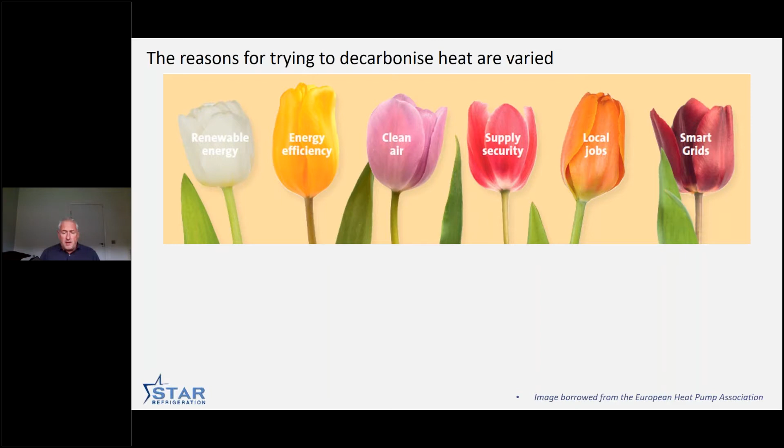It's really about interfacing the demand side of electricity consumption with the generating capacity. We've gone in the UK, I think somebody once said, from 60 power stations to 60,000 power stations that are much more variable. Heat pumps have a huge opportunity to help balance that by being ultra flexible and being able to switch off at very short notice, or modulate the capacity and use thermal storage. And we'll hear some great stuff about thermal storage later on as well.

So why is heat really the key thing? It's a huge part of our carbon emissions. If climate change is mainly about carbon dioxide, it's mainly about burning fossil fuels, and burning fossil fuels is mainly about heating stuff, certainly in a Scottish or UK context. So we're aiming at the big chunk of the challenge, and that's really the important bit. This isn't just a niche little afterthought. It's a huge bit, and the progress has been poor. It's really not achieved very much.

The numbers that get put up round about low carbon heat probably are mainly biomass, which had a tremendous trend for a period, and it's maybe not quite gone forward the way people hoped. Perhaps air quality concerns crept in, and that undermined things. Perhaps it was supply chain challenges, but it's really drifted off the agenda, and very seldom do I hear people talking about it so much. That's not to say it's not got a place, but it's really gone off the radar a little bit.

So the other reason that there's a big challenge with heat pumps is we're using heat in lots of different places, lots of spaces, at least 6 different bits going around the wheel, from the classic tenement in Glasgow to the city centre of Glasgow and the high density commercial areas, to new parts that are being built around the city, whether it's next to the science centre or further downstream. New build housing estates, still plenty of houses being built, and they all need to do clean heat. And then, of course, fixing all the old houses, the existing building stock.

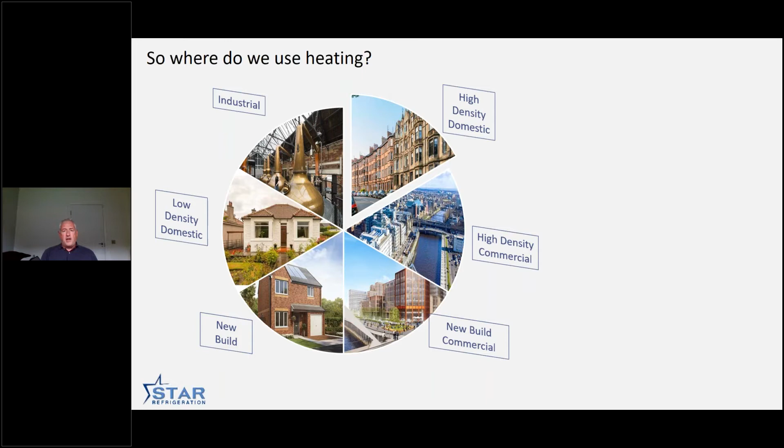So very, very different. And at the 11 o'clock position, industrial heat sources, a colossal amount of fossil fuels burned as part of industrial processes, whether it's brewing or distilling or food manufacture. Huge demand for that, and it all needs to decarbonize, and in many places it can do with heat pumps. So we're seeing it across all different sectors, and we're now beginning to see 100 plus, 160 degree heat pumps being talked about, and there's been some really good pilot projects done. So lots more to come on that in the coming years. So that's part of the reason it's very challenging.

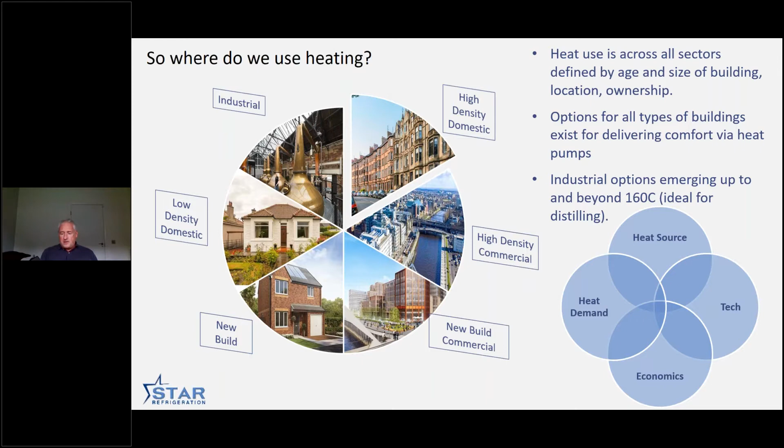Whenever there's conversations about heat pumps, people invariably start getting mixed up between the different bits, and they're all relevant, but they've all got a separate place. So when I think about heat pumps, I'm not thinking about the actual kit. I'm thinking about the business proposition. And for me, any heat pump needs to have a heat source. You need to have the right technology in place. You need, of course, to have a good understanding of what the heat demand is, and that has to stack up in an economic sense. I don't think we're going to get terribly far if we're suggesting that heat pumps are deployed, but they'll be 3 times the cost of burning gas. That's going to be a tough gig.

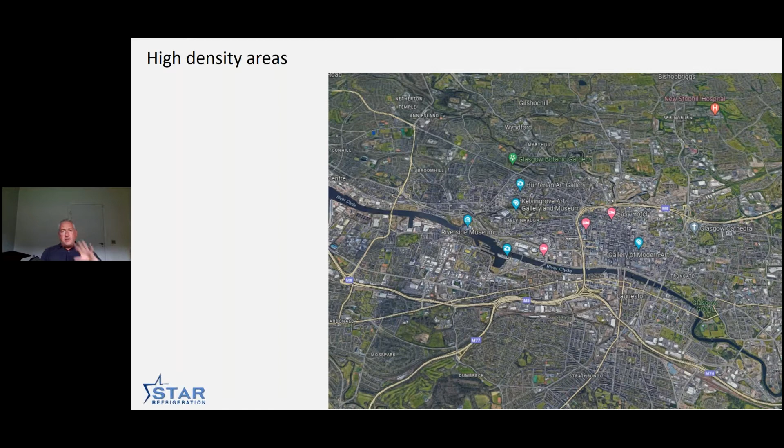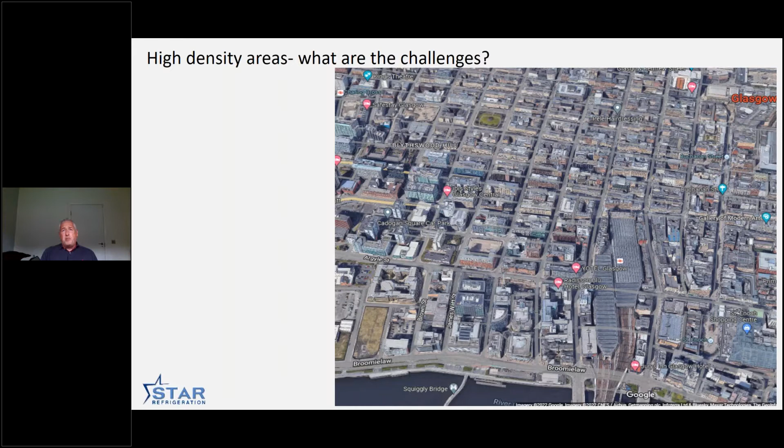So very specifically, this part of the presentation today is about high density areas of Glasgow. So slightly zoomed out, that area there that you can see. If we look at it a little bit closer, it's about the big buildings, probably over 5 or 6 stories. There's some much larger ones being built in the city centre, and for obvious reasons, it's a little bit difficult to put individual heat pumps into every single one of these buildings, for various reasons, including the sheer amount of heat demand that's required. We're not going to go around Glasgow and do external wall insulation of all these old historic buildings. Limited free space round about for any external works, whether it's in the ground or in the buildings themselves.

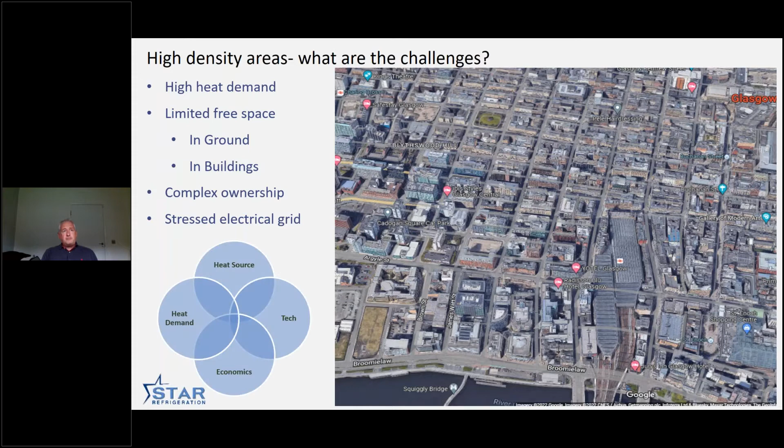Complex ownership structures, where you might have a building and there's a difference between the ownership and tenancy. And then, of course, the electrical grid. Most of the heat pumps that are being deployed are using electricity, and you've got to get the electricity to the heat pumps. And the closer you are to the building, the more stressed the grid tends to be. So perhaps centralizing the heat pumps is a way of doing that for these particular areas. So again, thinking about what the picture looks like in terms of those 4 parts of the Venn diagram.

So what have we done? Well, this is a quick flyby. Video speaks louder than words. Pictures have kind of stepped in in between. But this is Queen's Quay looking east up the river, the Clyde estuary. On the left is the energy centre, the college in the background, and the swimming pool behind that.

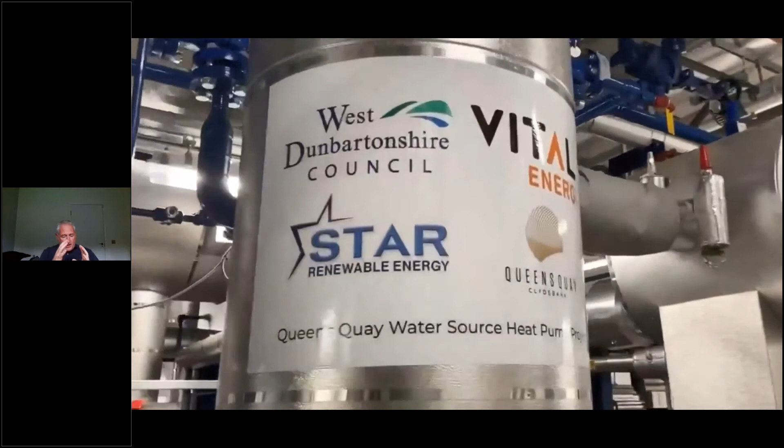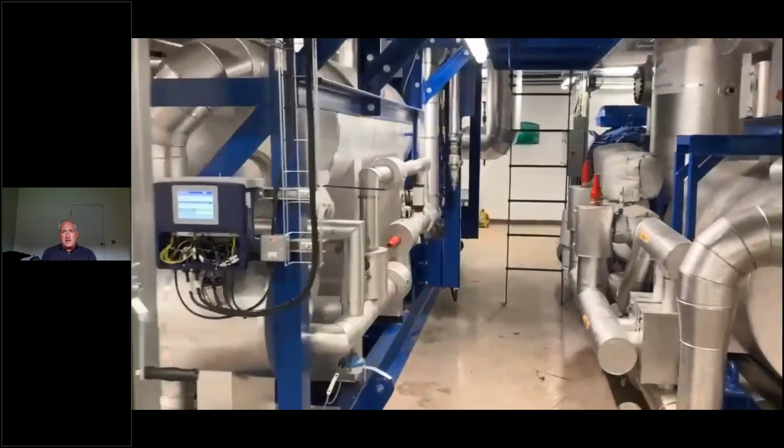And inside, really what I've tried to convey is this is a big chunky heat pump. This isn't something that sits perhaps in my garage through there. There's a Kensa heat pump, or anything outside the house as an air source heat pump. This is chunky kit for chunky jobs, and that's what was designed and manufactured in our factory in Glasgow, and deployed in Clydebank, and subsequently also in Bristol city centre.

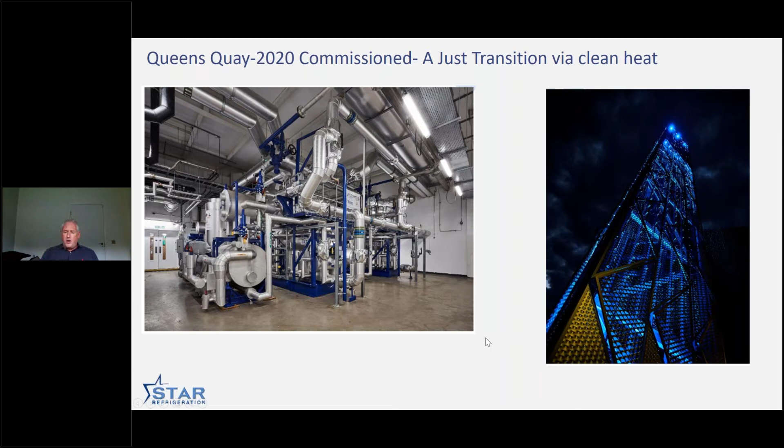And we've done overseas projects from Norway to Switzerland and Belgium and France. So plenty of activity over the piece, but always there's this little thing going on about how do you make this happen as a business model. So great project down there on the right hand side. You can see the thermal store, which is giving us a little bit of ability to move around when we're buying electricity, and that's going to be a significant part of the future.

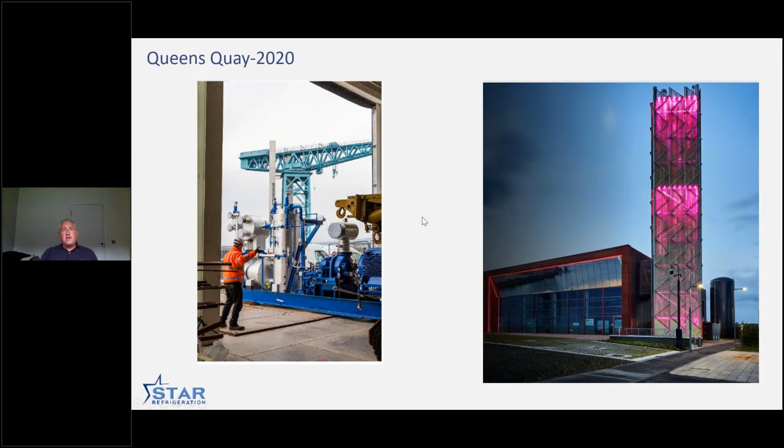But it's a great building, and it's part of the community down there. They've really done well to make it stand out. And again, you can see it's chunky kit that's being deployed in these big capacities. And what's it serving? Well, this is the Wheatley Group's new social housing block, and ultimately, I think there'll be 40 different buildings all served from these 2 heat pumps. Everything from the town hall to the sports centre, the Jubilee Hospital is on the plans as well. And it's really just about bringing pipes in the ground to these buildings and connecting them up and bringing that heat demand back to the central location and really sweating the asset as much as possible.

So to the second bit, moving from is this possible? Yes, it's possible, but what has to happen for it to be repeated? The project at Queen's Quay has some very peculiar circumstances around it. The renewable heat incentive existed in the UK's policy map at the time, and that basically paid twice the cost of burning gas at about 2.5 pence not to burn gas. So big subsidies over 20 years to do this. And then there were added subsidies in Scotland.

It was through the low carbon infrastructure transition programme, and down south the Heat Networks Innovation Programme is supporting local authorities typically to deploy heat networks, hopefully with low carbon heat sources, and a prime example of that is district heating. But these are not the long-term aspirations. So what do you need to repeat Queen's Quay in different bits? Well, the first bit is you need to have a heat offtake surety, and this basically means you need to be certain you're going to sell heat from the district heating.

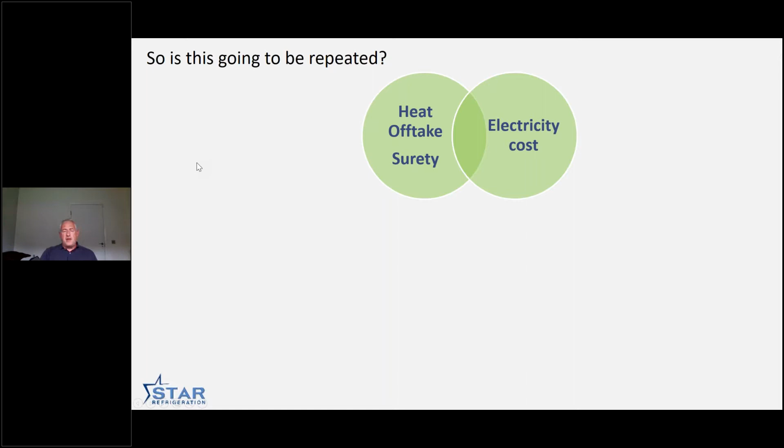So I'm going to give it a yes for the first bit and a maybe for the second bit, because there are quite well travelled plans already. You know, put aside everything you see in the news about politics and what's going on, the civil servants work away in the background trying to bring new policies along, both in Scotland and the rest of the UK. There's work being done on zoning, which basically is saying all the cities have to decide which bits of the city suit district heating and which bits don't, and think about how best to make that happen. So yes for the first bit and maybe for the second bit.

The piece of work that's underway is under the banner of REMA, and that's the Review of Electricity Market Arrangements, and that's basically looking at the way that we charge for electricity. We need to move forwards from ending up with too much electricity in one part of the country and not enough in the other, and a common price across the piece that stops suppliers offering preferential rates to help people use electricity at a better time.

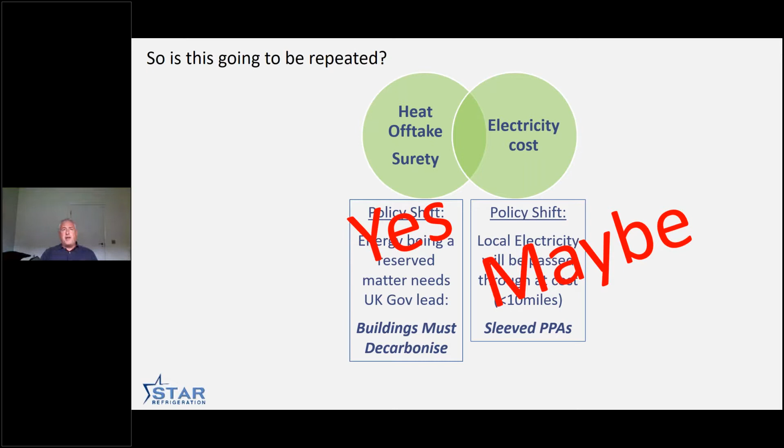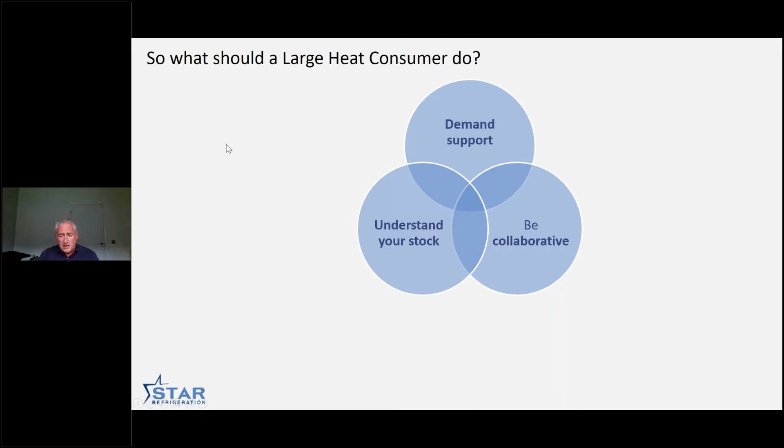So what should large consumers do? You know, if it was a university, for example, or a housing association, really it's about demanding support from the local authority. Don't try and solve the problems yourself. Be collaborative and understand your building stock. You need to know how much heat you're using and at what temperature the water is being used, and think about what's possibly going to happen. So speak to the local authority and say, look, we'd be really up for district heating if this came to our corner of the world.

And understand your building stock, you know, how much heat is needed is a key number, and how to do that. And think about the neighbours. Think, you know, all the buildings round about you, wherever your building might be, have got the same challenge. So don't try and do it by yourselves. Be collaborative, get speaking to the neighbours, and try and work out how that could go.

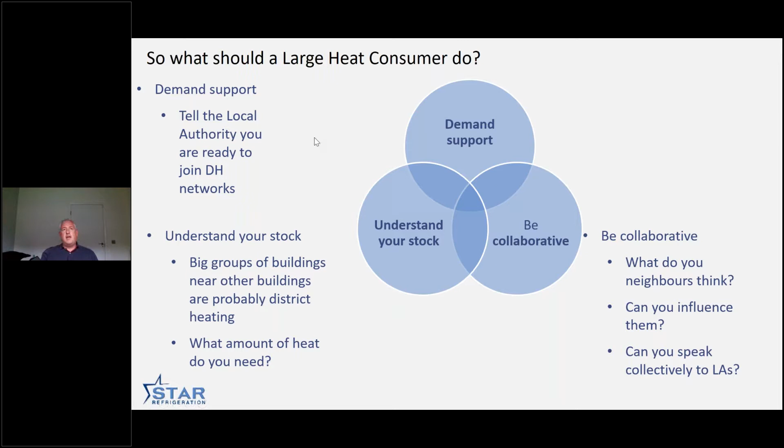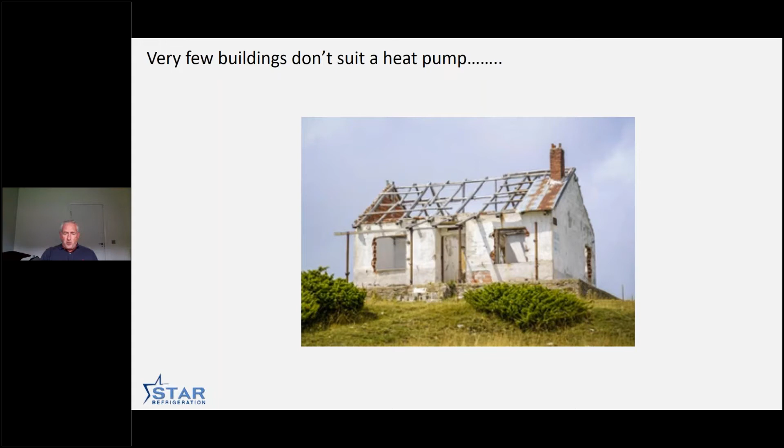Slightly flippant graphic from me, because I keep hearing that some buildings aren't suited for heat pumps, and I eventually found a picture of one on the internet that I don't think is really suited to a heat pump. But apart from that, whether it's small heat pumps or large heat pumps, any building in the UK could be heated with a heat pump, whether it's an individual heat pump just for that building, or a couple of heat pumps as a cluster, or part of a wider citywide district network. It's possible that all the buildings could be heated with that.

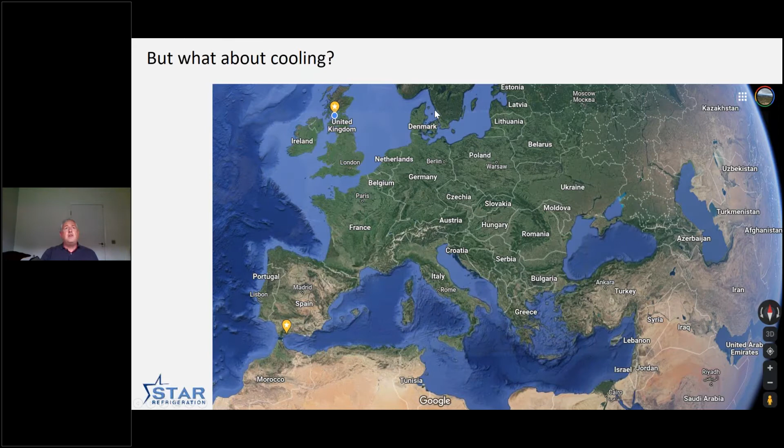Now, the next question that comes up with heat pumps in the last couple of years is, what about cooling? And really, it depends where you are. So where do you live? What sort of building vintage have you got? Does the building actually need air conditioning? Does it not need air conditioning? And some would argue that we might see these coupled together, where there's shared ambient networks where heat is being moved around from building to building.

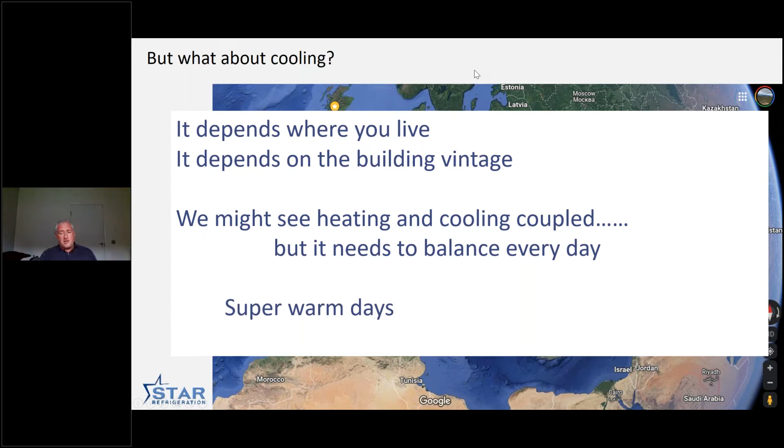A slight caution from a UK context is it needs to balance every day, so that the amount of heat going into the network has to equal the amount being taken out, and that has to happen on super warm days where it's cooling only and not much heat demand, but also has to happen on super cold days.

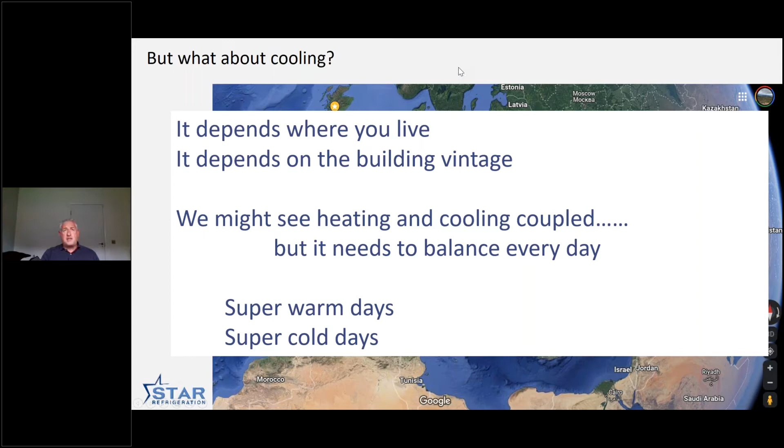So we've got to make sure our networks are designed for this, and maybe cut through some of the excitement around what seems like a good idea. But let's get into it in more detail.

It's less though than the amount of heat that's available from the river that runs through, and in fact the tidal reach of the river is way up in the sort of Gorbals area of Glasgow. So actually it's the tide flushing in and out twice a day that's bringing that ambient heat that can be harvested with the heat pump. So we've got enough capacity in the river.

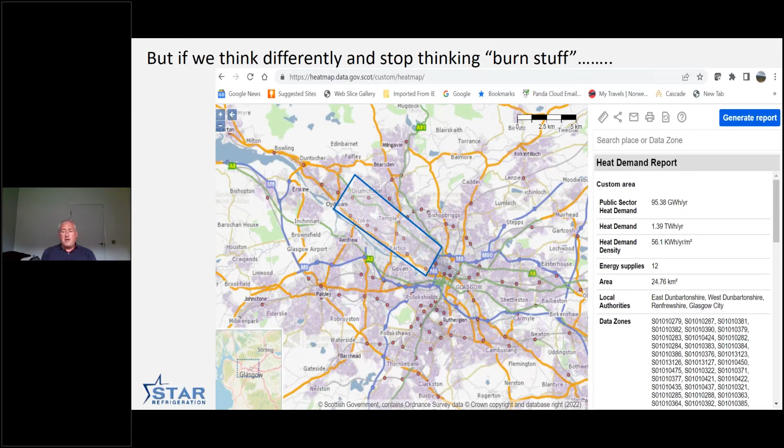We're building more and more wind turbines, and it tends to be windy when it tends to be chilly. And obviously there's some gaps that have to be accounted for. But broadly speaking, when there's a heat demand, there's an opportunity to generate electricity and then to harvest that. So if we get the electricity networks correct, get the pricing correct, and then of course start this colossal building program of district heating through the cities and connecting these buildings up, joining the dots, it should be possible.

So what about the Middle East? I touched on that, and this was a piece of work we did quite a long time ago that hasn't come to pass, but just to give a concept of thinking differently, if we start thinking about energy as a commodity rather than this sort of burn gas to heat stuff up. We were asked by some consultants to look at a city in the Middle East, and they wanted cooling, quite understandably so. But they also were wanting fresh drinking water.

You could deploy the sort of heat pumps that we've done in Clydebank, where the cooling part was used for cooling the city, but the hot part was used to desalinate seawater, and just totally turn the whole equation on its head. So the point is, if we start thinking about what the challenge is a little bit differently and not base it just in fossil fuel, we might see a completely different outcome from what we've been doing before.

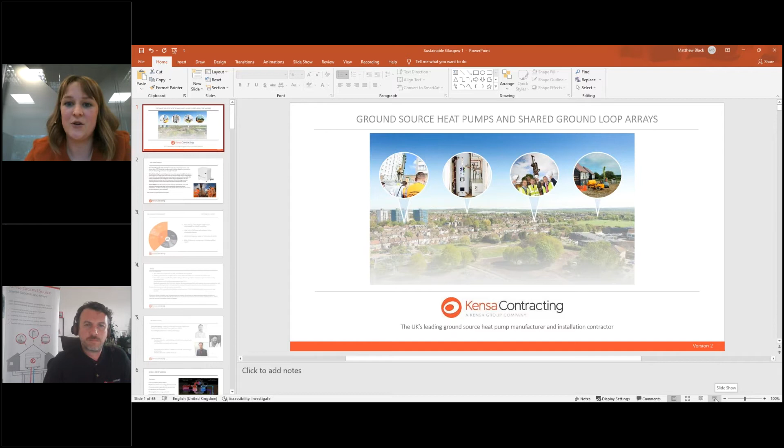who deliver ground source heating systems to domestic and non-domestic buildings, offering long-term sustainable solutions to the climate emergency and fuel poverty by providing low-cost, low-carbon warmth to Scotland's communities. So over to you, Matthew. I'm really excited to hear about your flagship project.

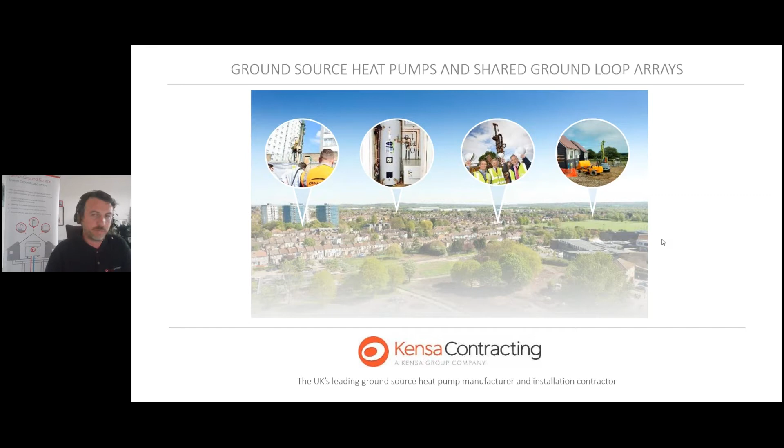Thanks very much indeed, Emma. Hope you can all see me and see the slides in front of you. What I'm going to do is just take people through a bit of an introduction into who Kensa are, and ground source heat pumps and some of the projects that we're installing in Scotland.

So just as an introduction to let you know who Kensa are, the Kensa group is made up of 3 companies. Firstly, we are a dedicated manufacturer of ground source heat pumps. We have a factory just outside Truro in Cornwall. That factory and our head office is on top of an abandoned, flooded tin mine, and we actually have pipe in that flooded tin mine, and we're using that heat to heat our factories and head office there.

So in that factory, we make about 20 to 30 Kensa heat pumps a day, and we supply them throughout the whole of the UK, and then provide other products and technical support to those contractors. Kensa Contracting has been around about 10 years, and that started to really facilitate the wider rollout of ground source heat pumps, initially through social housing, but increasingly through volume builds, new build housing, and through retrofit programs, some of them tackling fuel poverty and some of them more carbon emission focused.

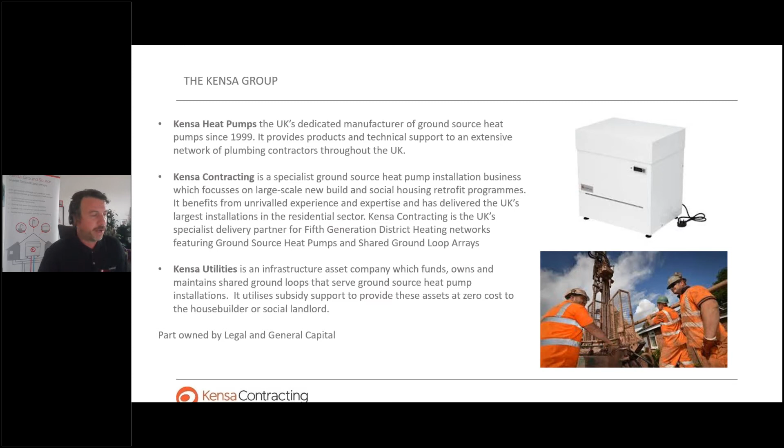And then the third company that we have is Kensa Utilities. That's set up as an infrastructure asset company to basically finance boreholes and ground array and the infrastructure. Like any infrastructure, such as broadband or water, ground source requires a bit more investment. So Kensa Utilities is set up to provide funding and financing for that infrastructure, and the group as a whole is part owned by Legal and General Capital.

So historically, there's not been too many ground source heat pumps installed in Scotland. It works so we have pipe work in the ground. Normally that is a vertical borehole, and through that pipe work we're circulating water and antifreeze, and the temperature coming from that ground typically is about 10 degrees. And the beauty of that is no matter what the time of year and what the air temperature outside is, we'll always be providing that heat pump with about 10 degrees.

And that's important because the efficiency and therefore the grid requirements, the demand on the grid infrastructure, how much it costs people to run their heat pumps, and the carbon dioxide emitted from the system is dependent on the incoming temperature and the outgoing temperature. So we can provide 10 degrees all year round regardless of what the air temperature is outside.

And importantly, typically about 2/3 of the energy for heating and hot water comes from the ground, and 1/3 comes from our wonderful Scottish renewable electricity, and that's just used to run a compressor and to run the heat pumps. 2/3 of the energy is effectively free from the ground, and 1/3 coming from electricity.

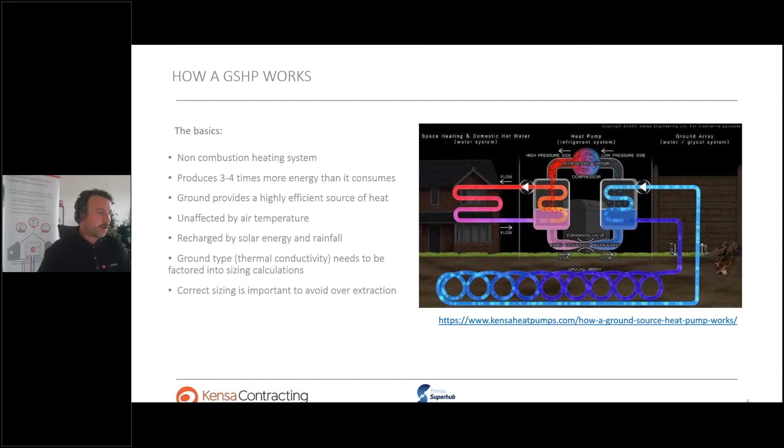So why ground source? It's unaffected by air temperature and air humidity. These heat pumps normally sit inside a building or inside somebody's home. Another white box that's pretty much a replacement for a gas boiler. Instead of being connected to the gas pipe, it's connected to a borehole array. So just a different set of pipes and a different white box.

So we can also provide cooling. So as well as taking a large volume of heat from the ground and compressing that and providing that for heating and hot water, we can also take heat from a home and put that back in the ground. So we can also provide cooling as well.

We can also use other waste heat applications. So we might be able to use open loop, so from some water source, an underground aquifer. We have a large project that uses an underground aquifer, but we can also use waste heat from industry. We can also use water source, so we can either float pipe, closed loop pipe, in a large water source, or we can extract that water and use that to heat buildings.

So the heat pumps sit inside. They last about 20 to 25 years because they're not open to the elements. And once we drill a borehole, it's there for around about 100 years or more. So it's more of a longer term strategy, a more sustainable legacy project, not something that you would be thinking about having to replace in the short term.

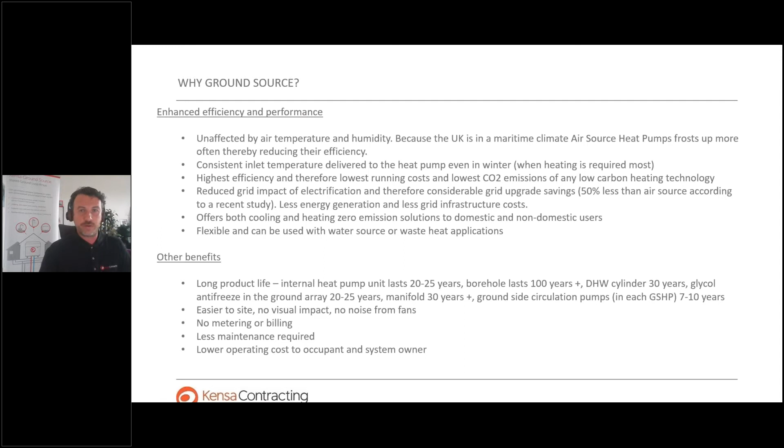There's no fans like air source, and from a heat networks point of view, if this is part of a heat network, it's normally connected to the electricity supply that's coming into the building. So you pay for what you use through your electricity bill, and there's no need for metering and billing.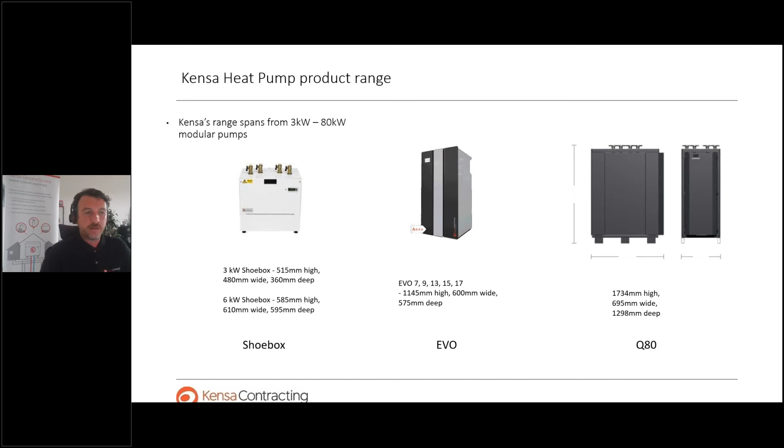And then we have the Evo, which is for slightly bigger properties, and then we have our Q80, which you can bank together for more commercial projects. So sometimes we'll also be providing heat to things like leisure centres, public buildings, hotels, and so on. And that's where we might have a few larger heat pumps banked together to serve those projects.

So normally when we're talking ground source, 90% of our projects are closed loop boreholes. And that basically means that we dig a hole, and then we have a drill which drills a hole vertically down. The hole is about 6 inches across, but is up to 250 meters deep. And once that is drilled, we insert pipework into there. We grout the hole back up, and then we fill the pipework with water and glycol.

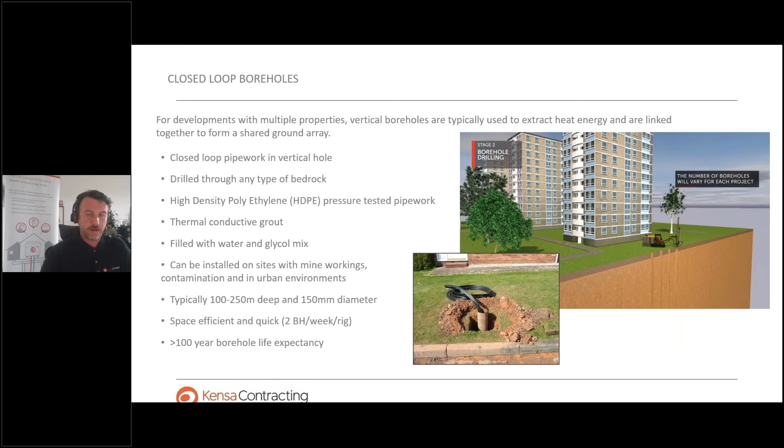And we install those into many different sites. So sometimes we'll go to a site and it might be contaminated, or it might have mine workings in it. We also drill in the public highway, we drill in car parks, anywhere essentially you can drill a borehole. And we do this in urban environments as well. So it's fairly quick and fairly space efficient, and once it's installed, that borehole will be there for a very long time.

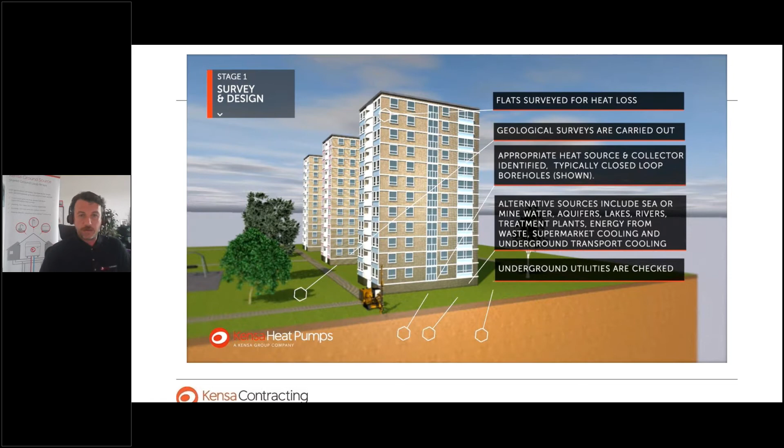So I'm just going to run you through a very quick animation. So we do quite a lot of tower block projects and retrofit projects. So this just shows you the installation process for a tower block. So we'll survey the property in terms of its heating and hot water requirements, and we'll look at the local geology. And we'll check underground services that may be there, and then we will come with the drill rig and drill holes in the ground.

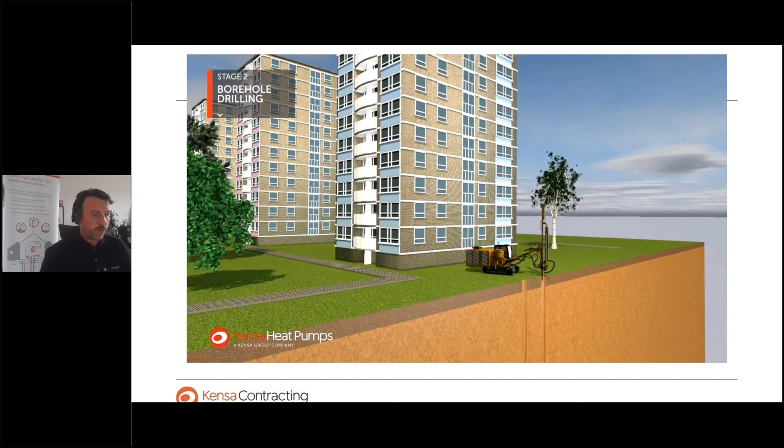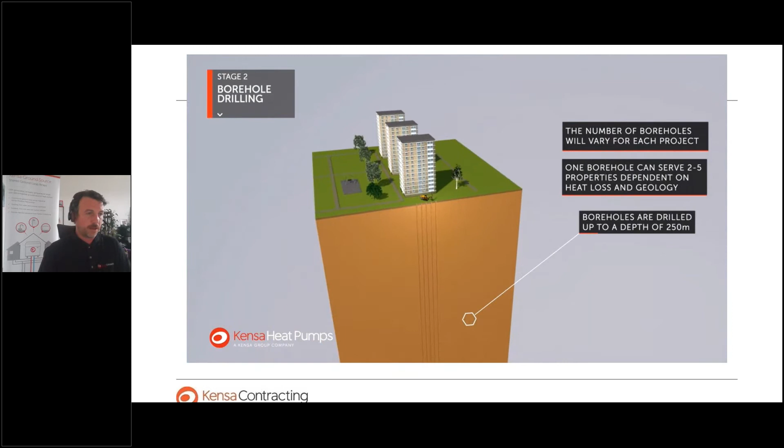And typically we don't need one borehole per property, but typically about one borehole per 2 to 5 properties. And that gives us these communal boreholes, a cluster of boreholes. And this is the kind of depth we go. And these drill rigs are on the road 24/7, 365 days a year, doing this day in and day out. We then insert the pipework into the hole, and we grout that hole back up, and then we trench the pipework together to a common underground manifold.

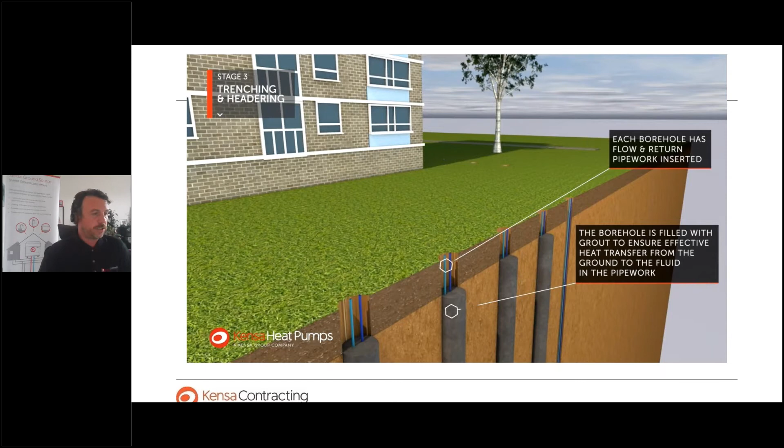And we do quite a lot of site visits as well. If you come along to one of our sites, the only bit of the project that you will see is that manhole cover. We then reinstate the ground, and from that manhole cover, we'll go into, in this instance, a tower block. So we'll go into the basement, and we'll insert pipework through the basement. So remember, typically this water is about 5 to 10 degrees Celsius.

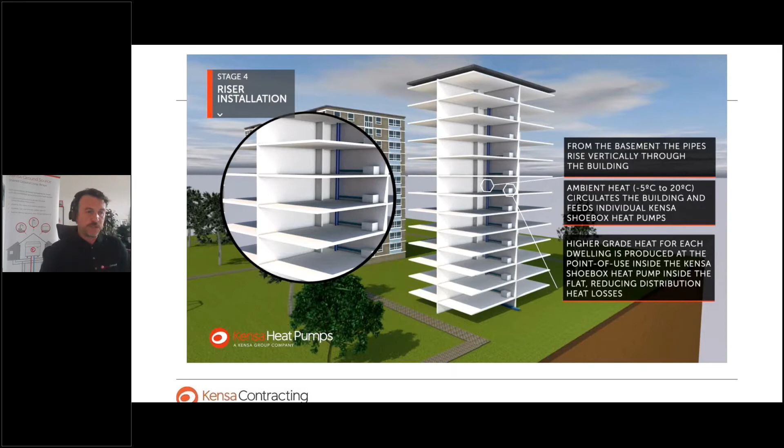So it's not insulated for heat loss. There's no heat loss coming from that pipework. And then we'll tee off to individual heat pumps in each property. This is good as it's very energy efficient, as we're only upgrading the heat at the point of use. We're not circulating high temperatures of hot water around, which is common from traditional central plant district heating systems.

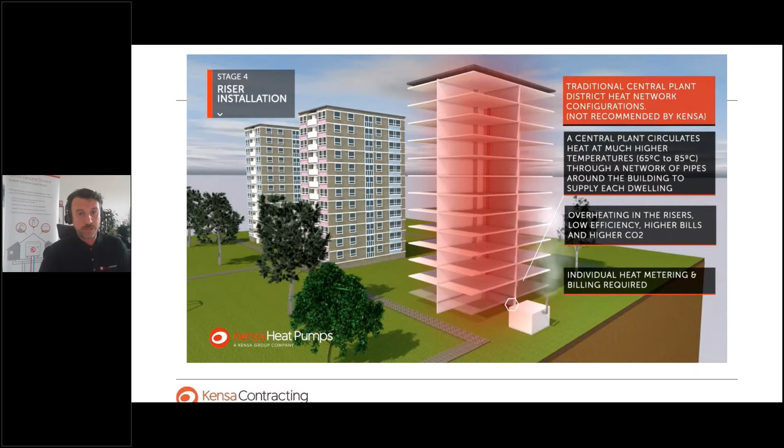And each heat pump is connected to the electricity consumer board in that property, so there's no individual metering and billing required, which is important if you're a local authority or housing association and don't want to be metering or billing your tenants. So inside the property, we'll connect to the heat pump, and on top of that will either be a hot water cylinder or a Sunamp hot water battery.

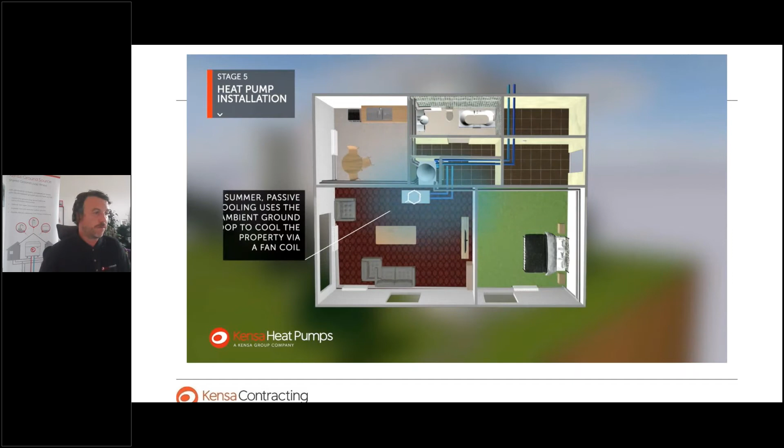And then from there, we'll provide heating through normal radiators and hot water. And we can also bypass the heat pump and provide cooling through a fan coil. So we're just passing chilled water through a fan coil, and that could be providing cooling through the summer months if it was required. So that's the kind of projects we do.

I'm going to show you some very exciting pictures now of drill rigs. So this is a project that we've installed for West Lothian Council in Livingston. This project was taken on a very dreich day in February. So this is the drill rig, and that's a completed borehole there. And that project is for, it's like an adult care centre, so it's supported adult living. So it's about 17 different housing blocks connected to about 10 boreholes.

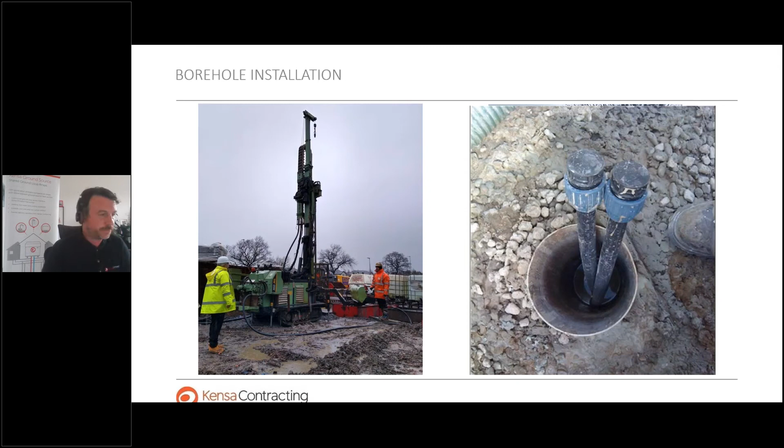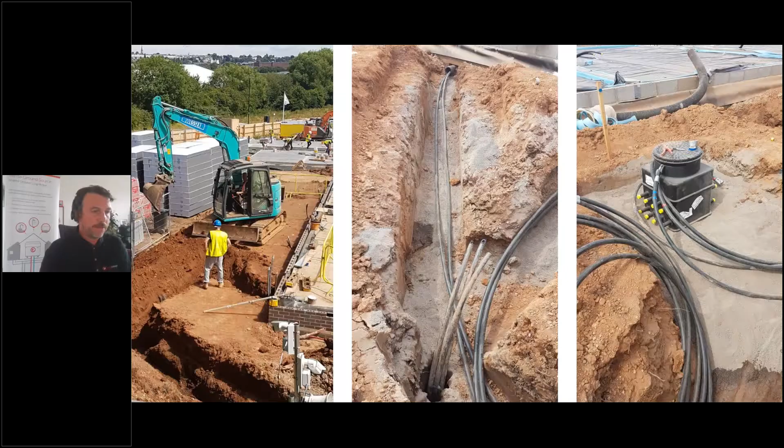This is a larger project in Bristol. So this is 200 new build houses, and this is us on site before the houses have been built. And this is us connecting all the connected pipework to the manifolds. And then on a new build site, we'll come up through the slab, and this is the borehole connection, and this is the point in the house where the heat pump and hot water tank will sit typically.

So the advantages are that there is no heat loss through the pipework, as it's a low temperature system. As such, it's actually classed as a 5th generation heat network. There's no energy centre, no plant room, nothing to look after, no heat interface units, no heat metering or billing, and then the residents of this system are free to shop around on the market for their electricity tariff.

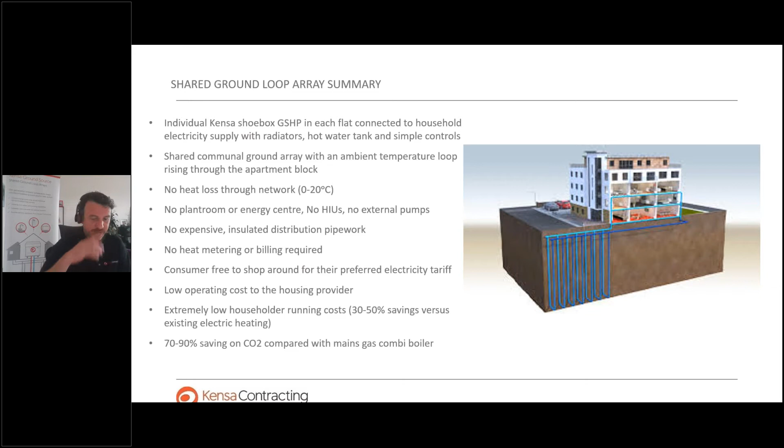And typically, when we're replacing electric storage heaters, we're able to save residents about 40 or 50% on their heating bill. And then compared to gas boilers, we are saving substantial amounts of CO2, so around about 90% in some cases. So a few case studies on other projects we've installed.

So this is one for Grampian Housing Association in Ballater, which is the coldest place in the UK, so I'm told. And on this project, we had granite, which is a very hard rock type. So we had a slightly bigger drill to get through that granite, but granite is also very good for ground source because it's very highly conductive bedrock. So we needed fewer boreholes to provide the same amount of heating for this.

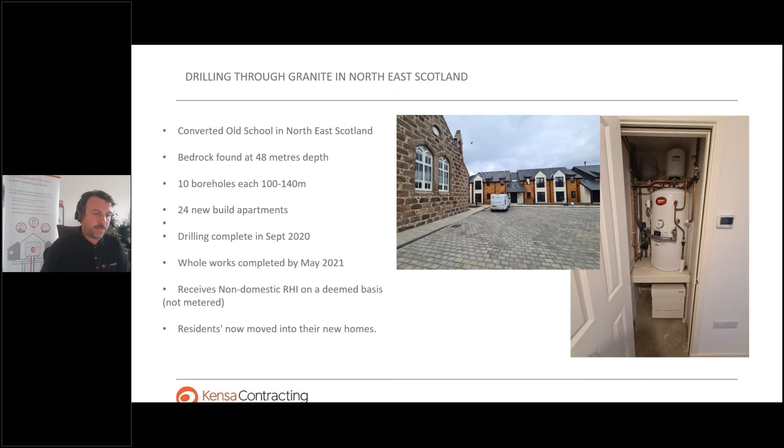So this is 10 boreholes heating 24 new apartments, and it's an old converted school there, which has been turned into flats, and then also some new build maisonettes. And the ground array is underneath that car park. So all the boreholes are underneath that car park and underneath the pathway going down the side of the building as well. And in that picture, you can see the Kensa shoebox and a hot water tank, which will be in the cupboard in the resident's home.

Some other projects we're doing, I mentioned the project in West Lothian. We've also just finished drilling on a project in central Edinburgh, which is a refurbished 19th century church turned into flats, and also another new block of flats. And those properties will also have Sunamp hot water batteries in them, connected with our Kensa shoebox system. And there's other larger projects coming very shortly across Scotland. A lot of these are new builds, but we have got one or two retrofit as well.

So everybody thinks that with ground source, you need a lot of land, you can only do it in the countryside.

And it's just not true. You can do this in urban environments and suburban environments, rural locations, and you can do it for high-rise tower blocks, new flats, any type of housing you care to think of, and commercial buildings as well.

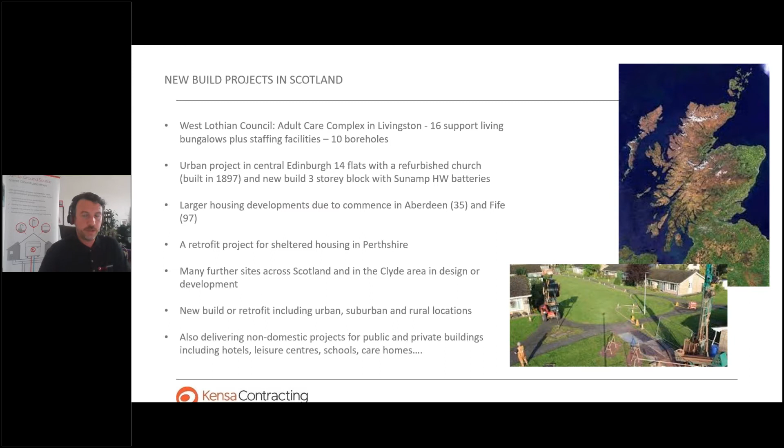So the future for us is really about deploying this technology on a street-by-street basis. And that means that a lot of our existing homes, if you imagine the typical street, most of our properties in the UK are some form of terraced housing, and we see this as how we can deploy heat networks in these areas.

And this is providing the infrastructure and funding that ahead of time, so that when people are ready to ditch their gas combi boilers and they're no longer allowed to fit another combi boiler, they can then tap into our heat network, and we will provide the upfront capital to install the infrastructure, and then for the heat pumps themselves, the customers will be offered support or finance or a way to make that affordable for them, and that's how we see this being rolled out street by street.

We're actually doing this on a village in Cornwall at the moment, where we've got 300 residents all signed up to take 5th generation heat network using shared ground loop arrays across that whole community. So something that we're trialing just now. We'd love to trial it in Scotland as well, and then roll out across our communities.

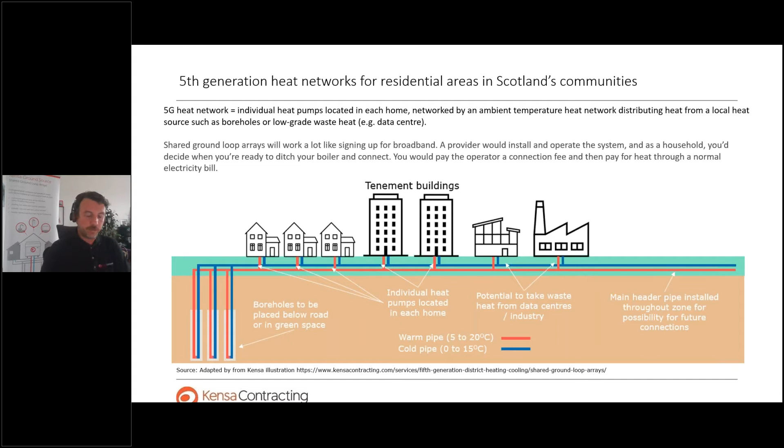A bit of word on funding. People don't realise how fantastic Scotland is for funding sometimes. A lot of this funding is not available in other parts of the UK. So there is funding out there for heat network projects and retrofit into social housing. And if you are thinking of a project or thinking of decarbonising a community where you are, I really urge you to do some engine searches on these funds, as they could really help you deliver those projects.

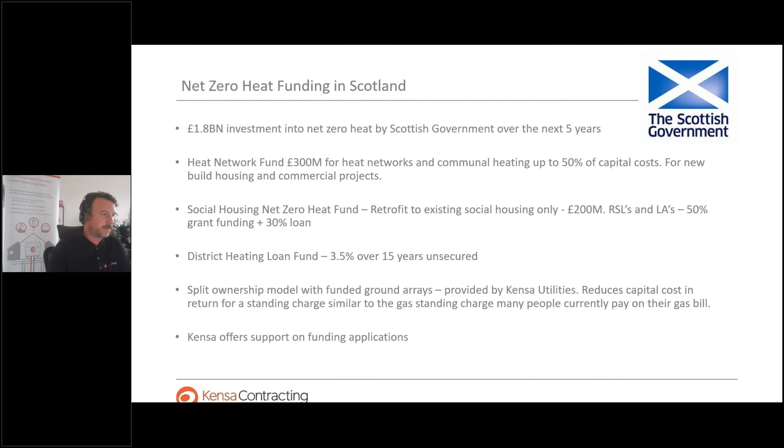Thanks so much, Matthew. That's really great, and I think hopefully there's lots of our audience that have maybe learned something new about heat pumps and their applicability, their diversity. I think typically, especially in the domestic setting, people very much nowadays are thinking of air source heat pumps, and sadly that technology would have been covered in terms of case studies with Paul at Procast Energy Services, but we'll be sure to link some of his case studies for anyone that's interested in the air source heat pump model in terms of retrofit or new build. But again, great advice there on different funding mechanisms and how financially this can make sense, and what benefits there are of doing these projects in Scotland.

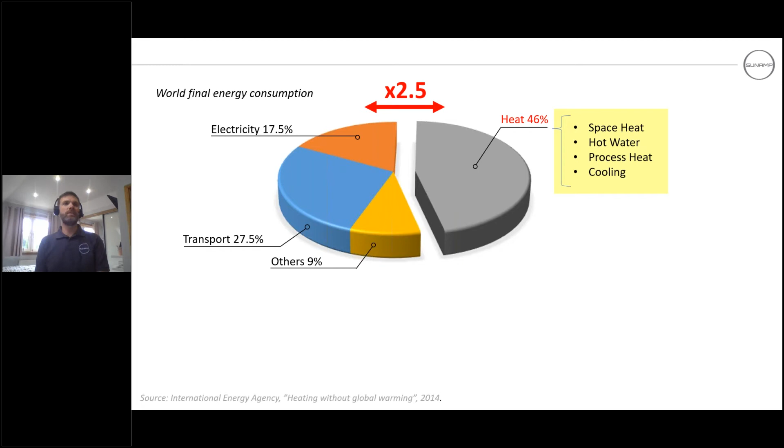what you can do. So for those of you that haven't heard of Sunamp, Sunamp believes in decarbonising the world via affordable renewable energy for all, and the only way we can sustain that is by compact thermal storage. Sunamp are an Edinburgh-based company. Our factory and sales offices are down at Macmerry, just near Tranent, just outside Edinburgh. It was founded back in 2006 by our CEO, Andrew Bissell, and it was through his vision that he wanted to change how we do things.

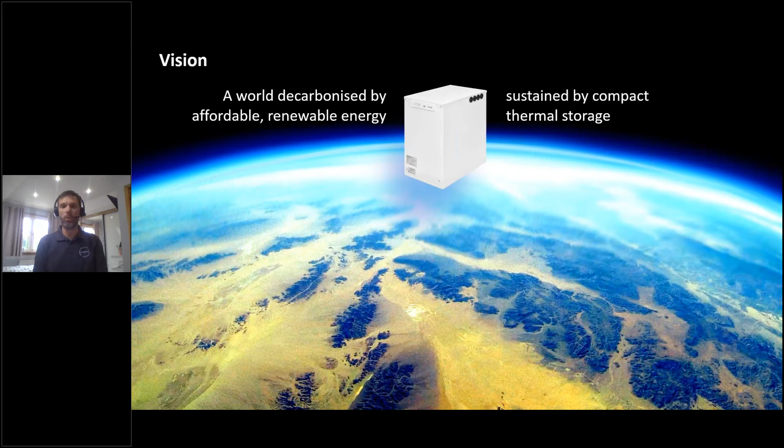He saw the opportunity: why not use phase change materials to facilitate the use of non-carbon fuels in the home. And what he developed was, sorry, I've just jumped a slide there. What he developed was a phase change material called Plentigrade. Now, Plentigrade is, as I've mentioned a few times now, a phase change material.

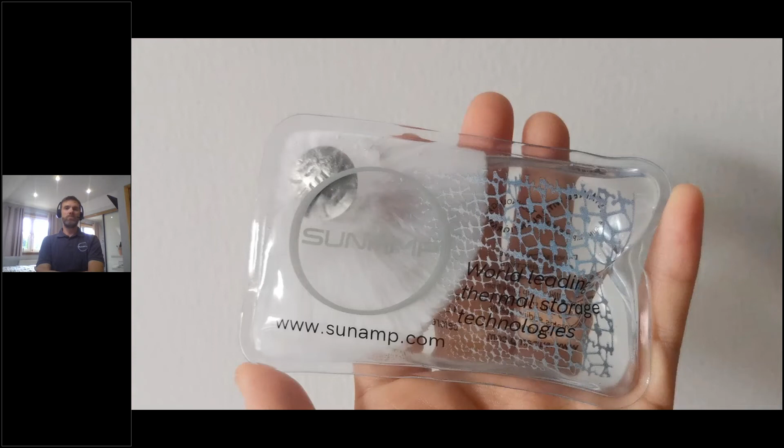And if this video works, you'll all be aware of these hand warmers. Our heat battery works exactly the same way. When the material is a liquid, it's just storing energy ready for use. And then when you require that energy, the material simply changes phase back to a solid and releases the latent heat that's held there. It's no different to what we're doing now. We're doing this in various different shapes, sizes and temperatures, which we'll come on to as well.

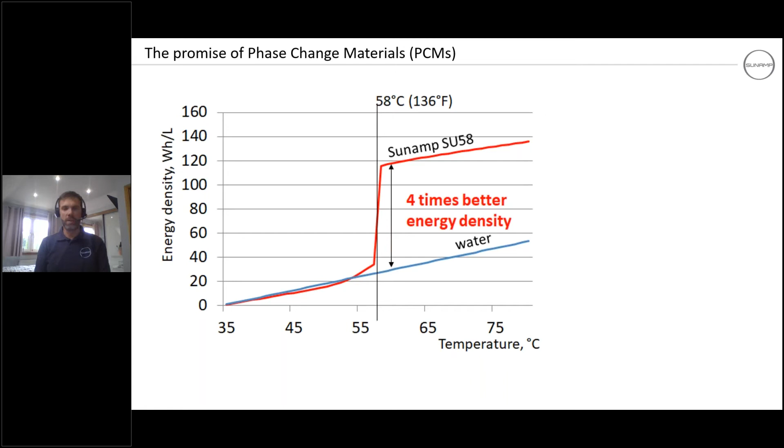150 and 210. The big thing about making the units smaller is it drastically reduces the heat losses from the unit. So we are only losing half a kilowatt a day. For those of you that can remember some old copper cylinders that were installed, they're losing 3 to 4 kilowatts a day worth of energy, and there's nothing you can do about that if you have one. It's just energy that is absolutely wasted. Yeah, it keeps your towels warm, but not much else. So the more we can save that, the better it is for everybody.

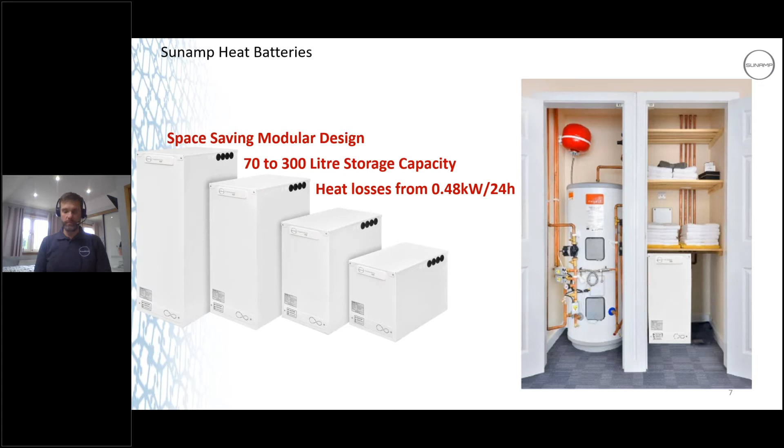With our batteries, it's going back to renewable sources and this intermittent use of electricity. We developed these batteries so we can accept all the different kinds of renewable energy. So whether that is from heat pumps, and as Matthew used as an example, yes, we can work with ground source, we can work with air source, we can even work with heat recovery units as well if required.

But more importantly, we can also work with district heat networks as well, whether it's solar PV, boiler or CHP heat methods, waste heat systems, or even just simply grid. Our batteries can be used in conjunction with them all. So it doesn't matter what you want to do or what's already in your house. You could use a heat battery to complement that and use it more, especially if you already have PV.

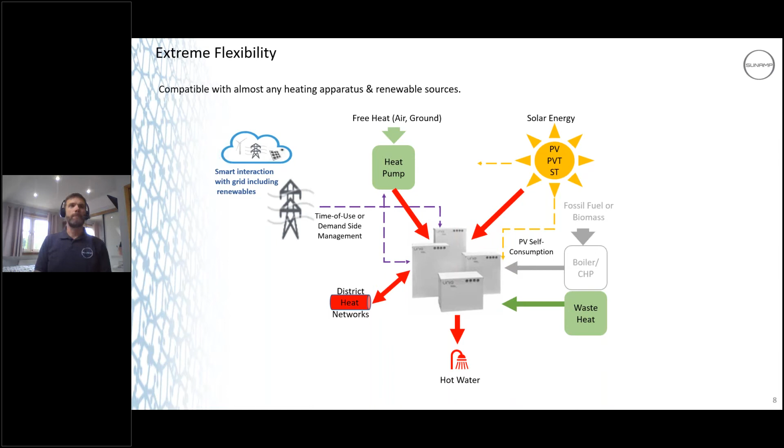So the heat battery isn't anything complicated. It's very, very simple. For all intents and purposes, it's a heat exchanger submerged in the phase change material that just sits there ready for use. The advantages of it: it's 3 to 4 times smaller than a comparable cylinder. As I've just mentioned, it supports renewable energy use. The heat loss is lower.

It is A+ rated. Not only is it A+ rated for energy losses, but the PCM is A rated as well, which is very important because when you think about batteries, all batteries are rated on the amount of cycles that they do. Where a normal lithium battery for storing electricity can work for about 10,000 cycles, our thermal store will basically have 42,000 cycles. There is minimal degradation in the PCM. It's under 5%, which in the context of a domestic house, 42,500 cycles is equivalent to 50 years.

Again, I like Matthew's analogy there, where when you're thinking about using a borehole, it's for the long term. It is the same thing with our batteries. The PCM will be working after 50 years. Once you've done it, it's there. And as there's absolute minimal working parts, there's only 4 working parts, just a couple of thermostats, safety devices, and a PCB. That's the only things that are on it, which obviously helps homeowners, less maintenance, in social housing as well. There's less to go wrong, which is always advantageous to ensure people have got heating and hot water when they want it.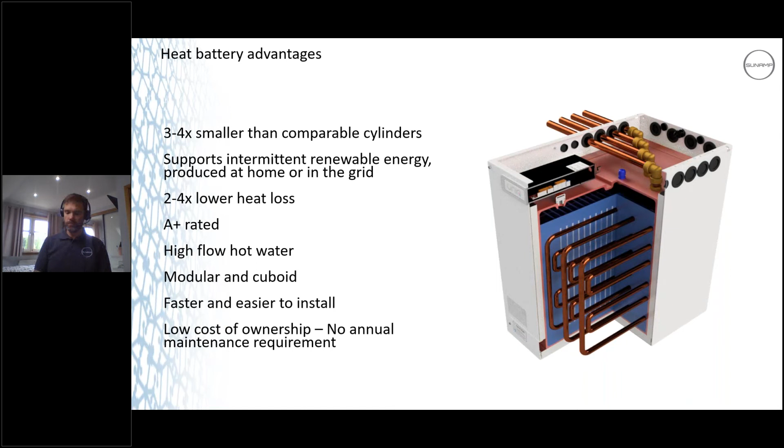So just a couple of wee examples of where we've been used, so you can see the opportunities where you could maybe use a Sunamp battery. One of the first ones we usually start with, because it was a big project that really put Sunamp on the map a few years back, was the Core 364 project, where there were 7 tower blocks that needed to be upgraded. This was just in the aftermath of the Grenfell disaster. So the housing provider decided to decarbonise these blocks of flats. And the question was, how can we do it? These were small flats, absolutely no space. Yes, there was a combi in it, but that was all the space they had, and only 2 cupboards in the whole place, in the hallway.

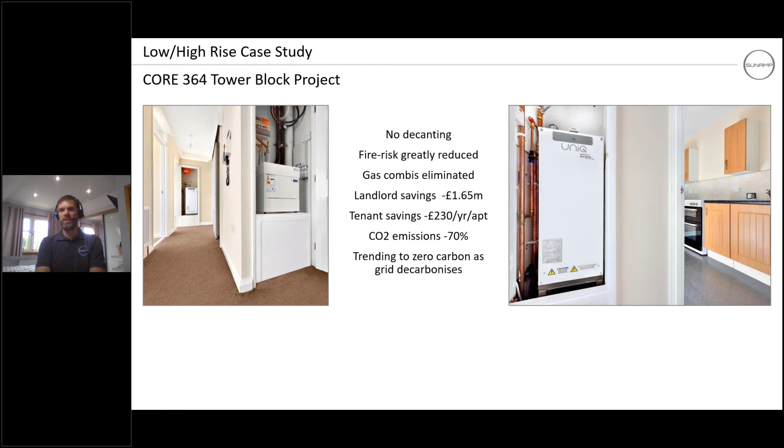Another one we then did was with Your Homes Newcastle, where we had a couple of 2-bed terraced homes. This was slightly different, as they used infrared heating panels to heat the house. But it was very much a case of, again, what do we do with the hot water?

There's no point putting in the PV, with in-roof arrays and the solar inverter, if you're not going to take full advantage of all that PV electricity that's generated. Yes, you can supply the house, but it's no benefit putting it to the grid, not for the homeowner certainly. So we looked at using the Sunamp battery.

So it is going to be a big saving, in conjunction with the infrared panels and the controls that Wondrwall have put into the home. The energy bills for that property are minimal. So it was a fantastic wee project to be involved with, and it has now led on to Your Homes Newcastle, Believe Housing, and a few others all starting to specify Sunamp as the go-to hot water unit within their homes.

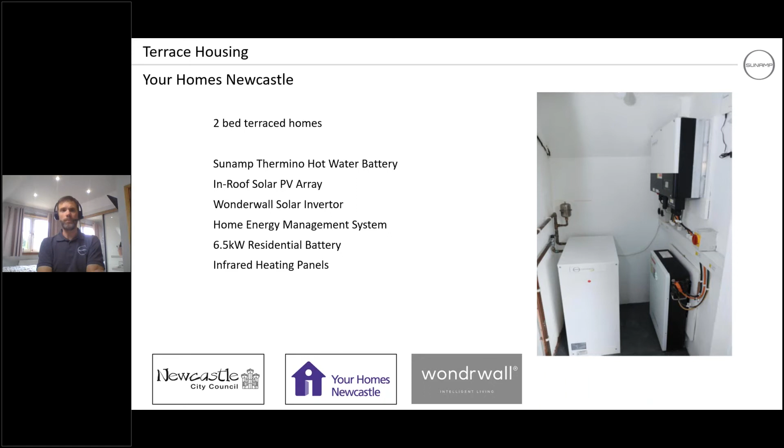A big part of it, they wanted it to be low carbon. It was very much in an area where there was obviously no gas, and they wanted to prove that you could do something different. You didn't have to have oil, you didn't have to have LPG gas, to have a new build in the Highlands. So they actually fitted them with air source heat pumps. They put some roof panels on, and there were thermal batteries working with the air source heat pump.

Now, what this absolutely has done is reduced levels of fuel poverty in the area, because it's estimated there's somewhere between a 40 and 60% reduction in the amount of energy they've used compared to what was originally planned using an LPG system. And that's predicted to save annually about 85 tonnes of CO2. So it is a big saving for the environment and for the homeowner.

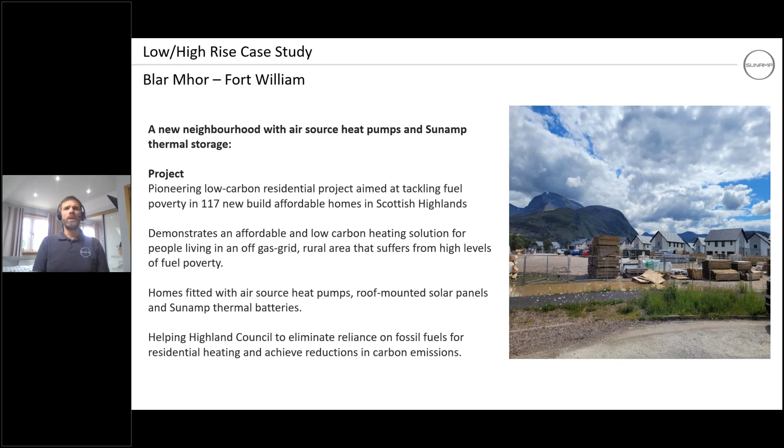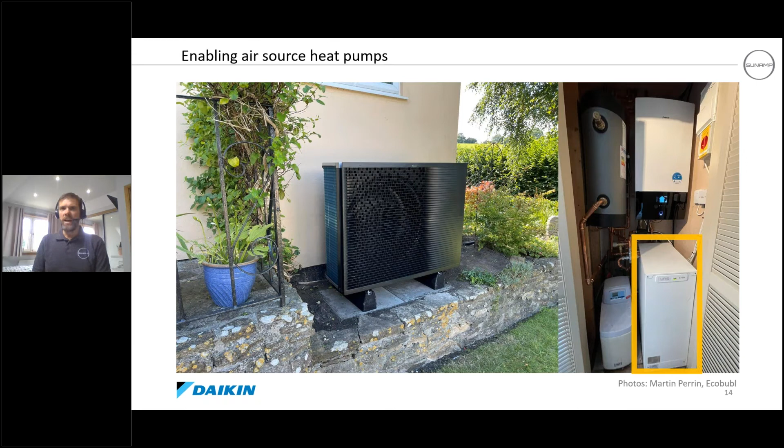The next one, same sort of thing. This was done with a wee project with Vaillant, where, using the heat pump again, they wanted to maximise the PV generation.

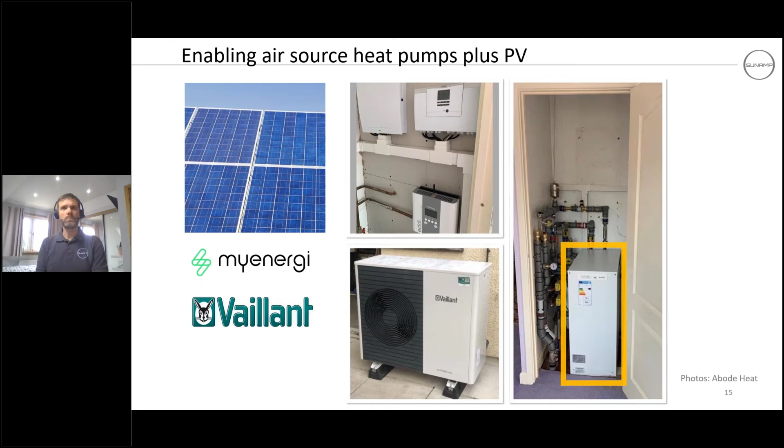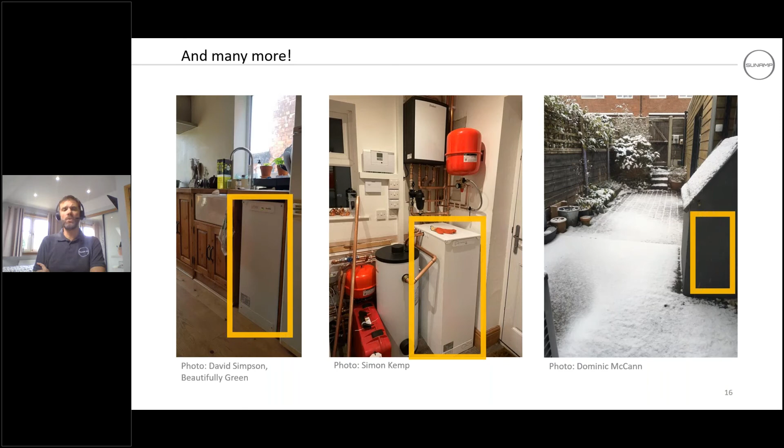And just a couple of other slides before I switch off. Although we've concentrated on hot water production, which is what everybody requires for homes, we are now also looking at industrial, commercial, and residential space heating, and the range we're using for that is what we're calling the Central Bank. It basically comes in three sizes.

The Central Bank Home, which will be able to give space heating for properties. And the advantage of this is, you might think, we've already got an air source heat pump or a ground source heat pump, why do I need to store energy for space heating? This can work two ways. One, it would allow you to time shift the actual load.

So rather than having your heat pump running at peak times, you could still charge this battery off peak, and then use the energy from that to heat your house during 7:30 to 9:30 in the mornings, or 5 till 7 in the evenings.

It also helps people adjust to working with heat pumps, because it is a slow, gradual heat, much lower temperatures. People used to gas boilers come home, there's a chill in the air, they flick the boiler on, and within 20, 25 minutes the house would be starting to warm up. With a heat pump, that's not going to happen, especially in spring or autumn when it's not on all the time.

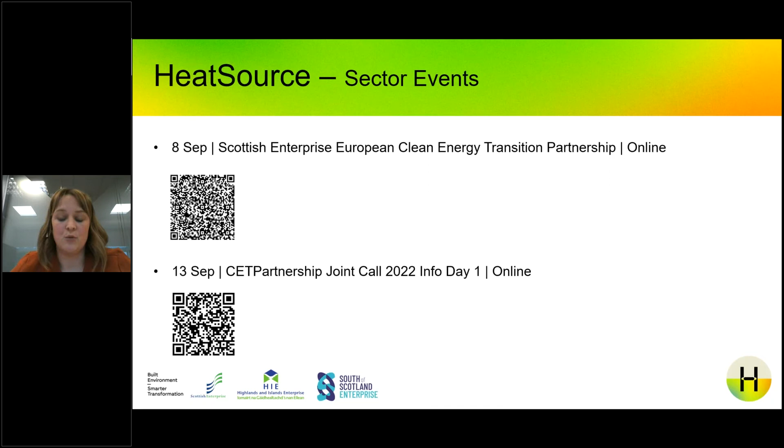Next up, also on Thursday this week in the morning, there is the Scottish Enterprise European Clean Energy Transition Partnership webinar. This will give an overview of the CETP, which is the European fund opening on the 13th of September. So you'll be able to join the Scottish Enterprise webinar on Thursday to find out more about what the support is going to be and what the overall joint call should look like. Then the official joint call opens on the 13th, and you can use that link there, CET Partnership, to join that official webinar to find out some more about the different work programmes there.

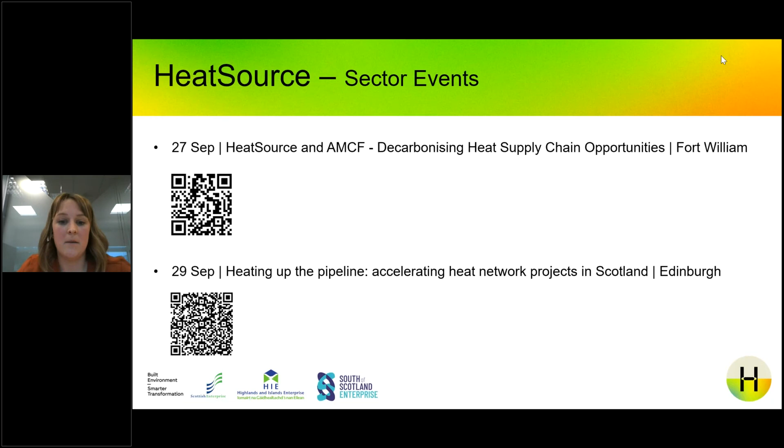And then just a couple of days later, there is Heating Up the Pipeline: how to accelerate heat network deployment and projects in Scotland, and that's taking place in Edinburgh. And then there is the Scotland's Manufacturing and Supply Chain Conference official exhibition at the SEC on the 13th of October. So any of you from industry that would like to take part in that can find out more information about registration and exhibiting using that link.

And then finally, at the end of October, we have BE-ST Fest, Built Environment Smarter Transformation's Festival of the Zero Carbon Built Environment, taking place as a month-long festival and diary of events in October. At the flagship conference we'll be hearing from Chris Stark from the Committee on Climate Change, and that's taking place here at Built Environment Smarter Transformation at Hamilton International Technology Park. Again, just click on that link or use the QR code, and you'll be able to register. Lots of great TED Talks and lots of workshops in the afternoon too.

And then finally, I just wanted to draw your attention, if you weren't aware, the second consultation on the new build heat standards is currently open and closing at the end of October. The Scottish Government are seeking thoughts and opinions on the new build heat standards, and there's a link in the chat that's been added there.

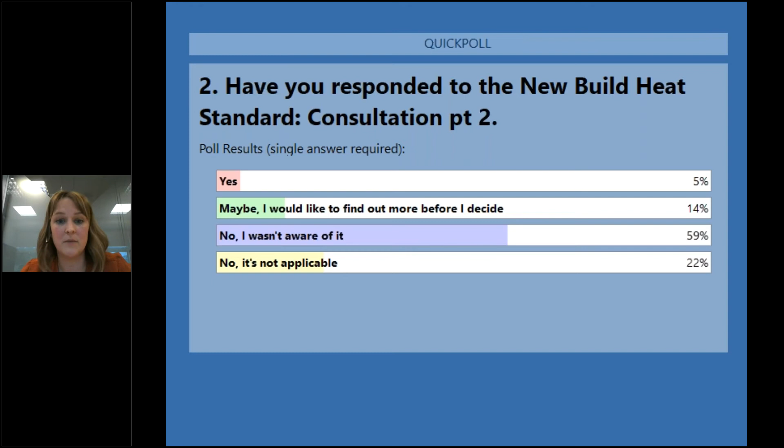Fantastic. Well, great. So plenty of you that weren't aware that was open. So yeah, please do have a read at the consultation and have your say, either at an individual level or an organisational level. Any insights that you can provide to Scottish Government will go a long way to influencing that policy.

So yeah, just inviting all of our attendees to turn their cameras back on, our panellists to turn their cameras back on, and thanks again for some great presentations. And we do have a few questions, so bear with me 1 second. I'll just find that.

So yes, typically, cost is on everyone's mind at the moment. Cost of energy and general cost of living issues. So the first question from Said says, heat pumps are good but expensive. What is the solution for the costs? Now, I'm unsure whether that's a larger scale that we would discuss today, or a smaller scale. But yeah, if anyone has any opinions or insights on that.

I can give you a consumer perspective as somebody that's done it. You have to weigh it up a bit more broadly. The heat pump is a fairly small portion of the cost of deploying a heat pump, is the first thing. So the total capital cost might be £4,000 or £5,000 for the heat pump and £15,000 for the total install. Making the heat pump cheaper doesn't make that terribly much more attractive. It's about making the total system simpler. I was very taken by David Wright's presentation, the bit that had a pod outside with all the kit in it. That could be off-site manufactured and done much, much quicker.